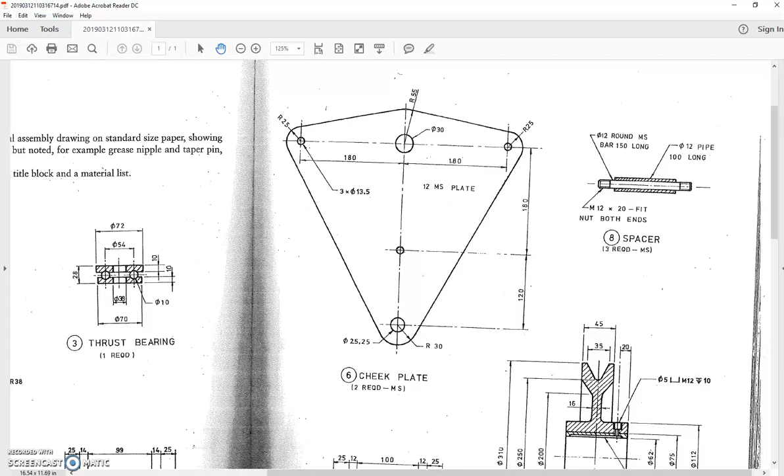Alrighty, so we've drawn the cheek plate, we've drawn the components to make the spacer. Now I'm going to move on to this sheave pin here. So when we have a bit of a look at this, I can see an axis line running through it, or a center line running through it, so I know it's a round, revolved type of shape.

Information tells you that it's an M profile 20 thread on both ends. So you can see that here by the double lines. That's basically showing the tip of the tooth and also the root of the thread going on there. I can see that it's 25mm long. Then we've got this 12mm spacer section. 100mm in the middle of it. 12, 25 again. Diameters are 30 and 62.

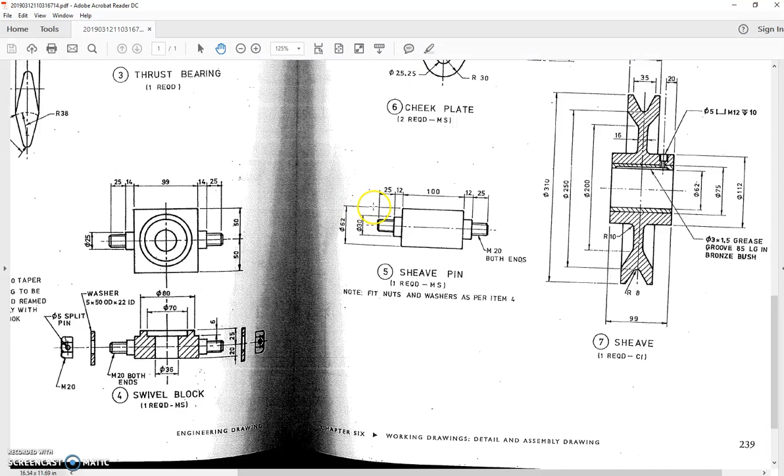So, do I have a 30mm hole? It's going to go in that hole there. That one's a 30. That one's 25.25. Must go up here. It's the only place I can see that that sheave pin will actually fit. And I'm guessing that it works with the sheave. How am I going to draw this thing?

Well, I'm going to draw it as a revolve. When I draw a revolve, essentially I draw this center line and I draw everything above that center line. When I dimension the diameters, if I measure from a surface and then to the center line, it will automatically understand that it's going to be a revolved item and give me the option to type in the diameter. So the 30, the 62, and also the 20 for the thread. Okay, so how do we actually do that?

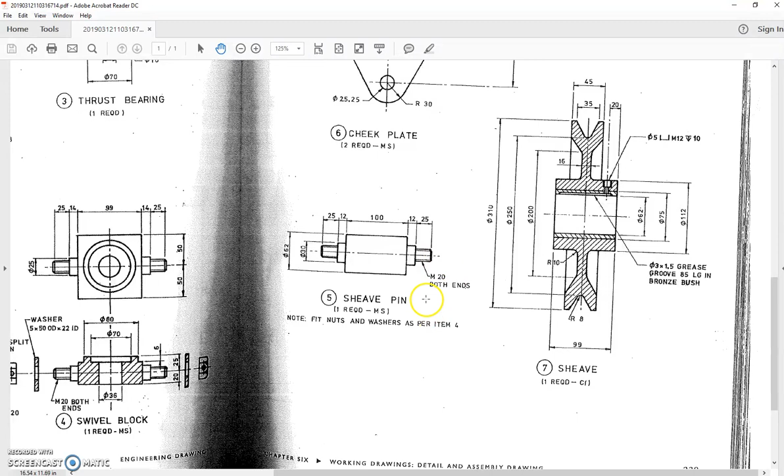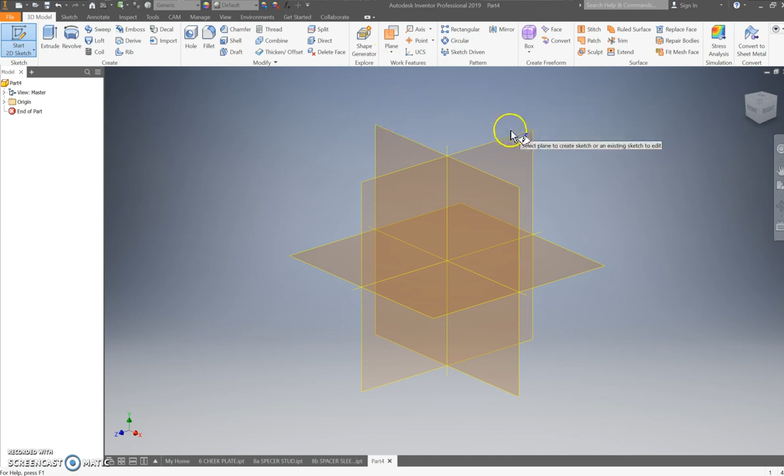Let me swap back to Inventor now. That one's been saved. I'll minimize that. My parts collection is growing and growing. New standard millimeter. And here we are. Again, just maximize that workspace. This time I'm going to draw that on this YZ plane. Essentially, I'm looking at it from the right-hand side.

Now, I need to draw a line. I'm going to draw it across the center, but I need it to be a center line. So up here, I can adjust what type of line I'm drawing. Starting my line, let's even draw it crooked. I know its total length. If I add them all up, 100 plus the two 25s, so we're up to 150, plus the two 12s, we're up to 174. 174 long. And escape turns that off.

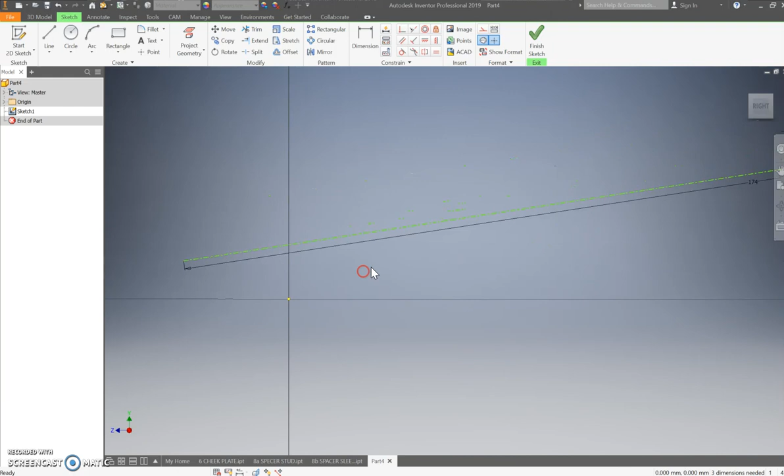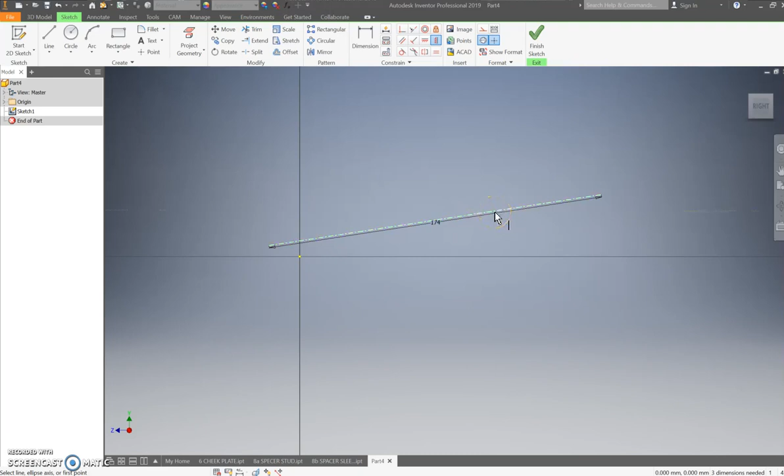Awesome. You've drawn a crooked line in the middle of nowhere that's not constrained to anything. How do I go about fixing that? Well, this thing needs to be horizontal for starters. Except now that I'm working in my right-hand view, horizontal is no longer horizontal. If I use my vertical, it is. If I pick a point anywhere along here, it lights up the whole line and says, hey, do you want to make this thing horizontal? Well, yes, I do.

Next, I'm going to use my coincident constraint. I'm going to take the center of the line. The green dot says, hey, I found the center point or an end point, and I want to line it up on my center. When I go to the center, it goes white. Hey, presto, I now have a fully constrained center line. Escape turns those things off. Turn off my center line. I want to start actually drawing properly. I'm just going to sketch this thing in. I'm not even going to try to put the right dimensions in on it at this point.

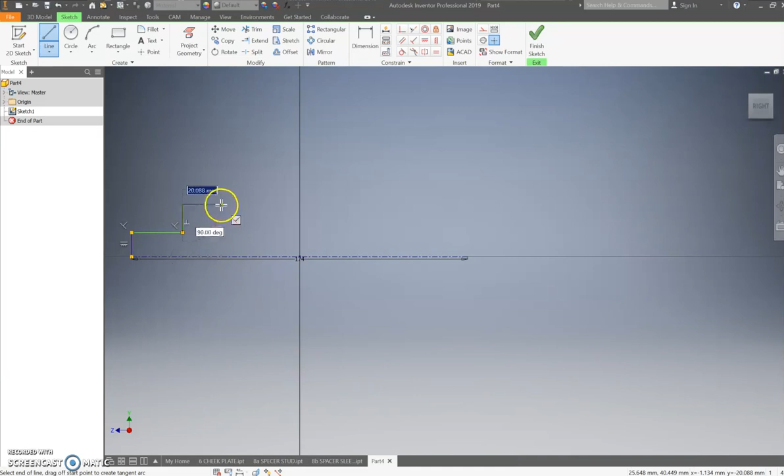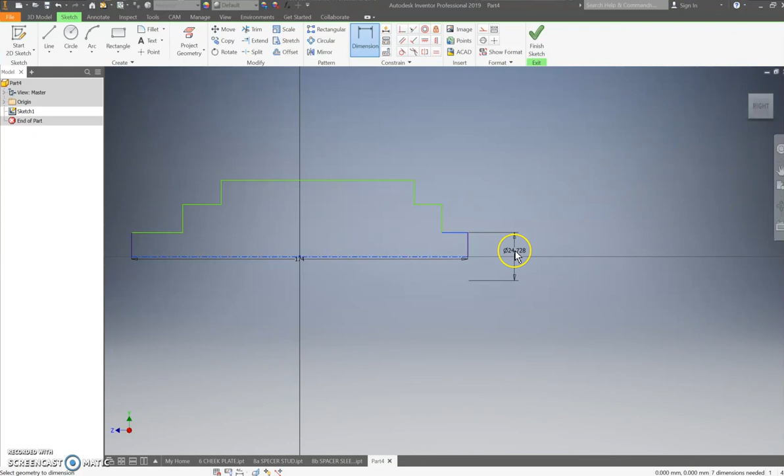Okay, it goes across and it essentially mirrors those going back down on the opposite side. I'll look for a drop down. It's a little bit masked by the dimension. There we go. Dimensioning this thing. Like I was saying before, if I dimension from a line to the center line, it automatically tells me that's going to be a diameter. This first one, diameter 20. That one's for the thread. This one goes in the cheek plate itself. This one had to be 30. Hit OK, and then I'm just left with the outline of it.

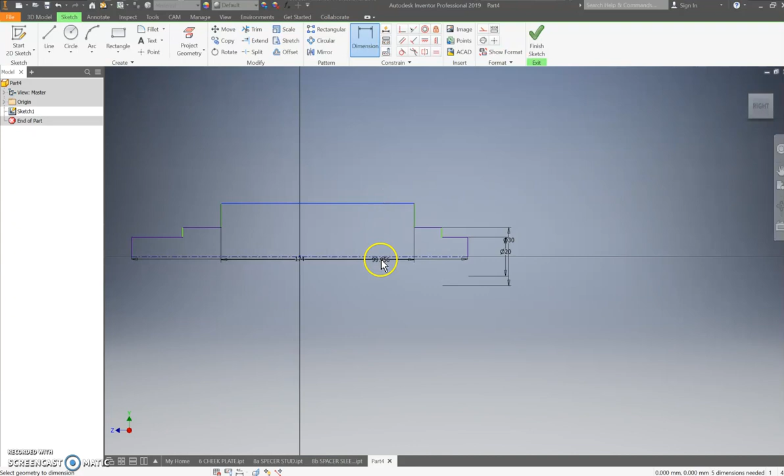Now, what you may or may not have noticed as I was drawing these, 62 on that one, is that I was looking for a constraint line, a dotted line running across from one side to the other as I drew in this second side. If you didn't do that, just grab whichever constraint you need and line up the center point of each of these with the corresponding one on the other side.

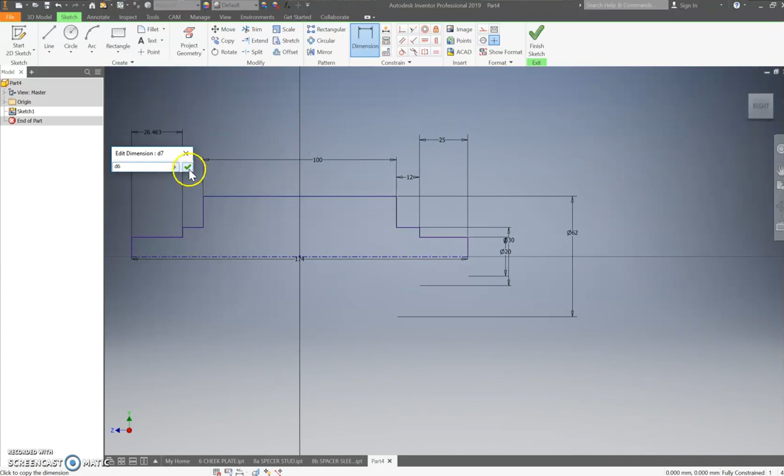All right, sticking with dimensions. This one needs to be 100. This one needs to be 12. This one needed to be 25. Matching ones on the other side. This one needs to be the same as that. I don't need to put this one in because that's the space that's left over. It's going to be 12 because it all adds up, doesn't it? I can put that in as a double check. Yeah, hey, presto, it is. I don't want to place it. Okay, my sketch is complete.

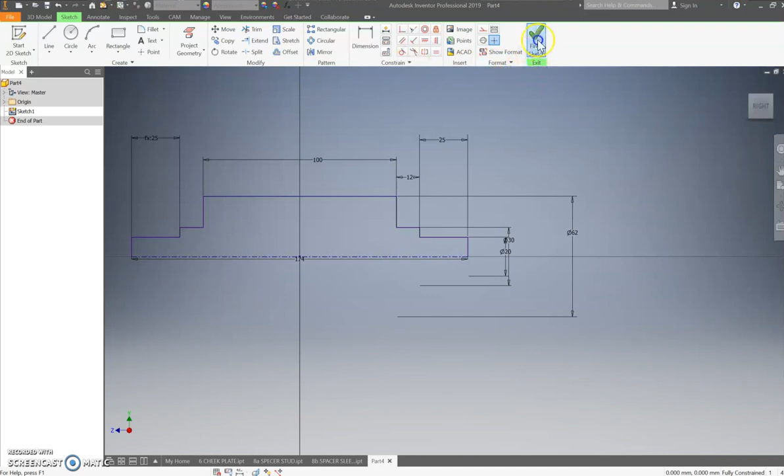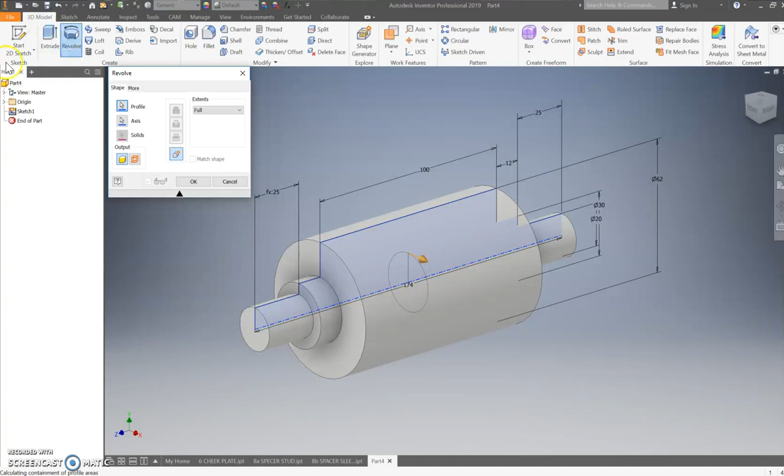Let's zoom out a little bit so we can see everything. Don't worry about all those dimensions looking a bit messy. We're just building a sketch. So revolve. There's only one profile to choose, and it has a center line, so it automatically knows that profile gets spun around that center line. All I have to do is hit OK. It's done. Straight up done.

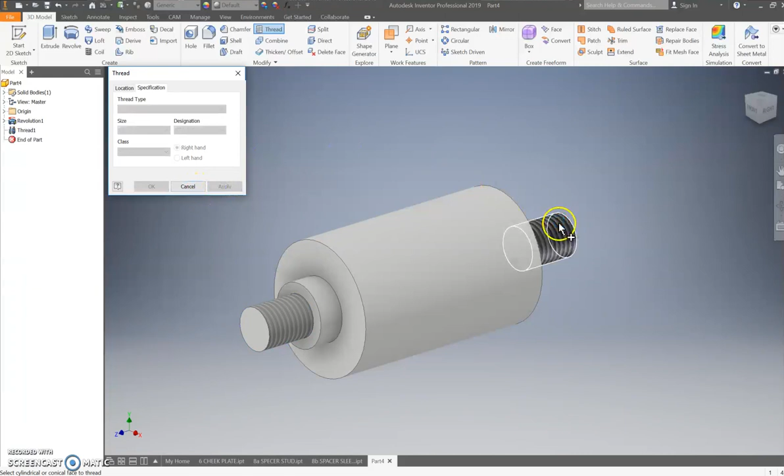Now, however, threads. I do need to put some threads on. I need to put a thread on here. Yes, it's the full length of that face. What I'd like to check is that it's using a metric profile, and what size has it chosen? Good, 20, because that was 20, and the standard for that is a 2.5 pitch. I say apply because I want that same thread on the other end, and OK to finish it off. You may have noticed you have the option to do a left-handed thread.

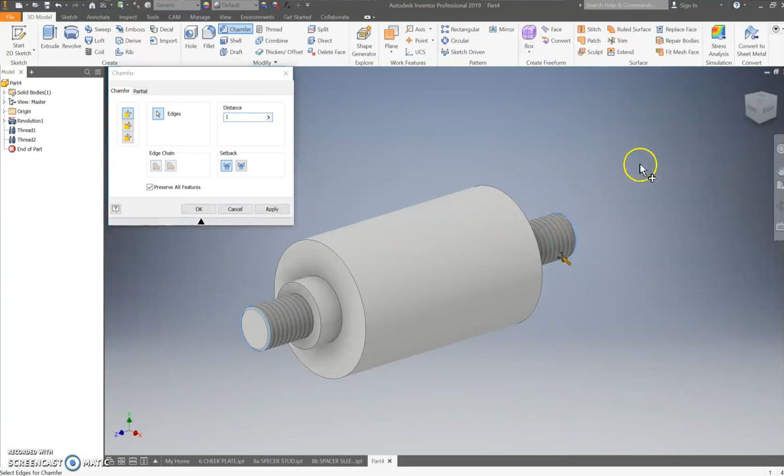Now there should be a little bit of a chamfer on here to help lead the nut on. We're going to bring that down to 1 millimeter. This edge and this edge, and OK. One last thing to do with this part is assign a material. It tells me that it is a mild steel as well. Where am I? Mild steel. There we are. It just says a polished surface. We can live with a polished surface at the moment.

All right. So have a go at drawing that one. It's a revolve, a little bit different to what we've done in the past. Have a crack, and I'll see you very soon.